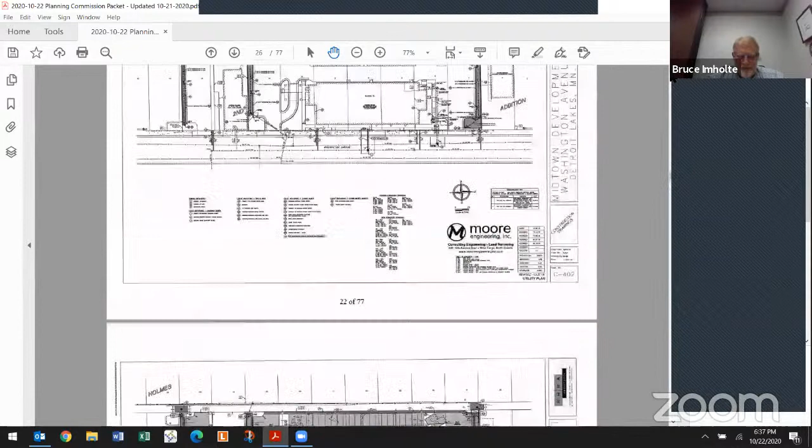All right, thank you for that. And again, I appreciate your patience on this. So the first item is a public hearing to give consideration to a variance to allow 13.61% landscaping at 1218 and 1234 Washington Avenue. That's the Midtown development.

And before we get too far on that, I just looked across the street, Larry, and I noticed they got one of the buildings labeled 1212. So I don't know if that's a technical thing we need to worry about, but just please note that. I don't know if we have the right address on those. All right, Larry, if you could give us the rundown here, please.

This is a request from Midtown Development for 13.61% landscaping instead of the required 15% landscaping at their address. We have it as 1218 to 1234. I don't think the physical address is that important. If it's 1212, that's probably close enough, but I'll take that up with Steve Hansen and see what the address should be.

The reason they're requesting a variance is that after they got going with their project, they discovered that the trenches that were going to be filled with landscape rock and plantings were no longer big enough or held enough volume of stormwater to satisfy the Pelican River Watershed District's requirements. So with the changes they've had to make, if you look at the plan on the screen, the green and the pink are the areas that are going to be landscaped. It comes to 13.61%. They're short 806 square feet of landscaping.

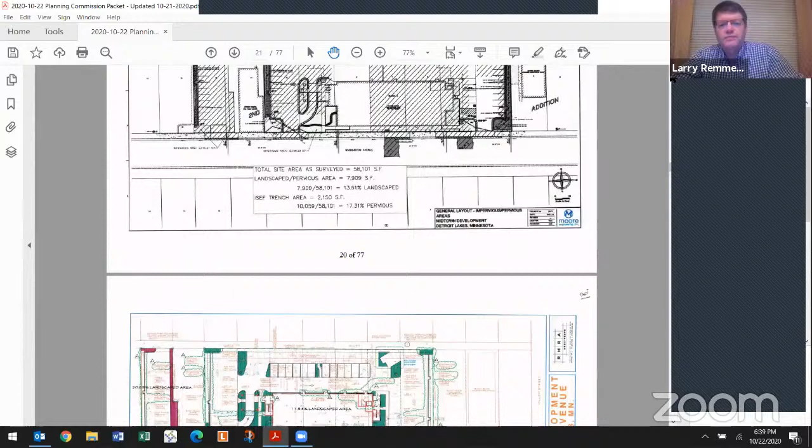And if they would have been able to landscape where they wanted to, if you look on this next map, the dark gray bars were also areas that would have been part of their landscaping, and they would have exceeded the required landscaping. So now they've got stormwater treatment on the site and landscaping at 13.61%.

In order to consider a variance, the Planning Commission has to make findings, and staff has recommended that the following findings be considered. First, the variance is in harmony with the purpose and intent of the ordinance, as the project will provide some landscaping on the site for aesthetics and also provide stormwater treatment. Two, the variance is consistent with the comprehensive plan, as it will allow a commercial use in a commercial district. Three, the proposal will put the property to use in a reasonable manner.

As I mentioned, the original plan met the landscaping requirements. However, due to changes in stormwater treatment required by the Pelican River Watershed District, the stormwater treatment areas could not be filled with landscape rock. With this change, the project no longer met the 15% landscape requirement.

The circumstances are unique to the property, as the original stormwater plan had landscaping that met the city's requirements. And the variance will maintain the essential character of the locality, as the new project will provide stormwater treatment as required by our ordinance, and 13.61% landscape coverage where none existed prior to the development.

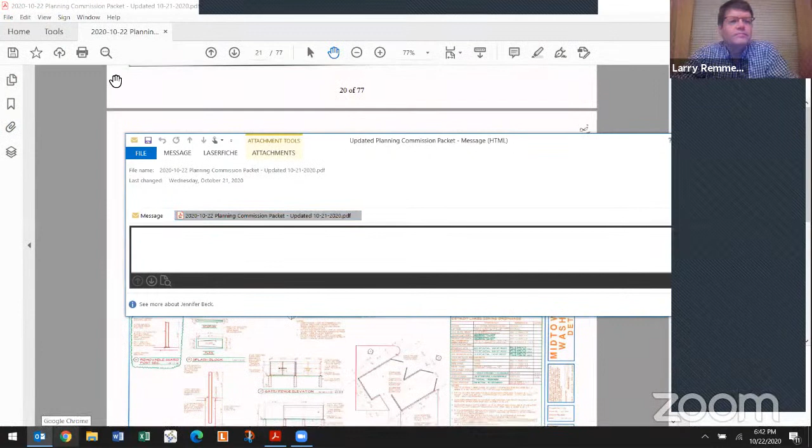Jen, do you have that letter? Could you read that? Is there anyone from the watershed on the call that has the letter in their possession? They could read it? Yeah, Kelsey, go ahead. Yeah, Bruce, I can read it.

Go ahead, please. This says: Dear Planning Commission members, on behalf of the Pelican River Watershed District, I offer the following comments regarding the variance. The applicant had included a landscape feature, a rock grate system on top of the stormwater treatment practice, which is the trench with an iron and sand filter. However, after consulting with Andrew Erickson of the U of M Stormwater Research Center, he recommended not using the rock landscape feature on top of the practice due to it impairing the function of the stormwater management practice, which is the phosphorus removal, and making it significantly more cumbersome to maintain the practice.

The district approved a stormwater management permit for the site in 2018. However, the current as-built site does not comply with the district's 2018 permit. The district respectfully asks the commission to include as a conditional approval of variance an approved Pelican River Watershed District permit for the as-built site. Thank you for this opportunity to comment. Signed by Adam Mortenson from the Pelican River Watershed District.

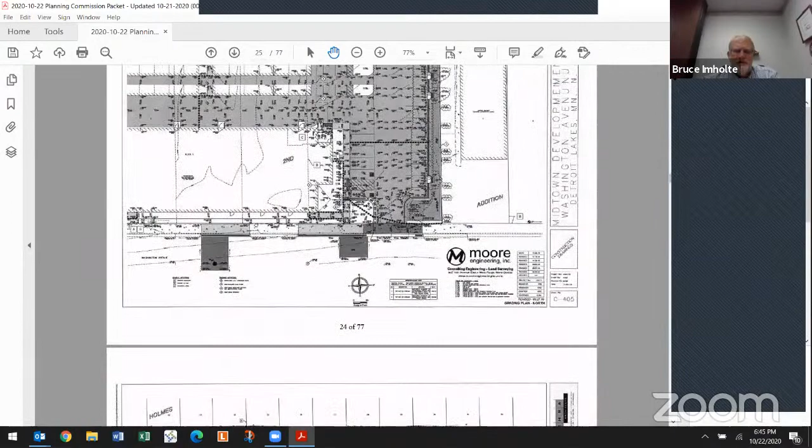Is there anyone else from the public that would like to comment on this variance for Washington Avenue for Midtown Development? Anyone else in the audience? Yes, Bruce, Jim Buus is online here. Oh, Jim, okay. You're representing Midtown Development, I assume, Jim.

Hello? Jim, are you there? Now you can hear me. Can you hear me? Yes. We can figure this technology out, right? I hope. Please go ahead, Jim.

All right, yeah, Jim Buus here representing Midtown Development. I don't have a whole lot to add to what Larry said. He did a good job explaining the situation. I would just say, as many of you know, we're about 3.5 years in on this project. It's a long road, but we're really proud of what we've accomplished with this site, and we're desperately motivated to just get it across the finish line here. This is one of the last things hanging out there. And as Larry said, we've had a little confusion over the years. We felt the rules have slid a little bit, and we've tried to comply.

I think we had everything approved at one point, but things slid a little bit. We were out of compliance a little bit with those pits, and with a little bit of changing direction from Pelican River primarily. The second thing is we tweaked the very far northwest corner of the lot where we ran into a natural gas line and had to tweak things a little bit. We just got a little over 1% out of compliance there, but we would respectfully request the commission's approval because we don't have anywhere else to accommodate that extra 1.3% on the site.

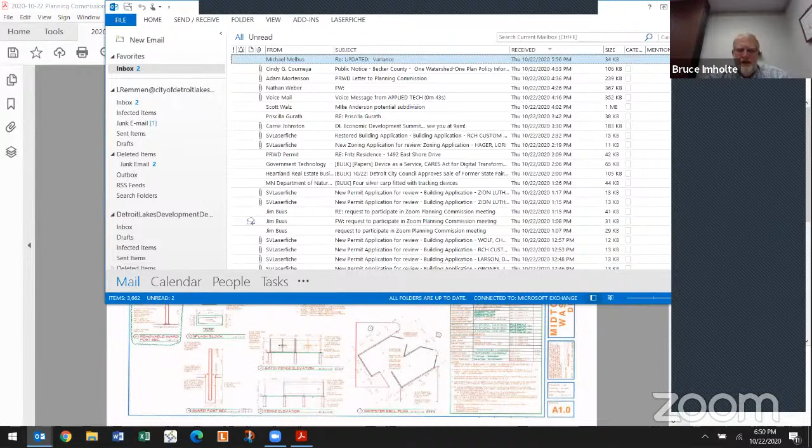That's not a problem. Well, I'd appreciate it. I've just been shopping for bushes at our office, and for about 75, 80 bucks you can find something that's about 3 feet high—not a tree. You can get these, I don't know what Ginny calls them, but different kinds of bushes that just expand out. I don't want you to cover up your windows, I understand you need that, but if you would consider that, it would help break up the whole sidewalk there, so much pavement, because now that the street is in there, there's a lot of pavement from one end to the other.

As long as nobody else is speaking up here, I do have a question, Kelsey. As you read the letter, I got a little confused from what Larry started out with. To me, the letter said the watershed just wants to come into compliance with the 2018 permit. They're not asking for something new, are they?

Bruce notes that the letter asks the commission to include, as a condition of approval of the variance, an approved Pelican River Watershed District permit for the as-built site. He's unsure if they're looking for a new permit or just compliance with their existing permit, and asks Larry to correct him if he's wrong.

Larry says it depends on how you read the letter. His reading is that they wanted a new condition on the permit requiring an as-built permit from the watershed district, which seems like a bit of overreach. He notes nobody from the watershed district is on the call.

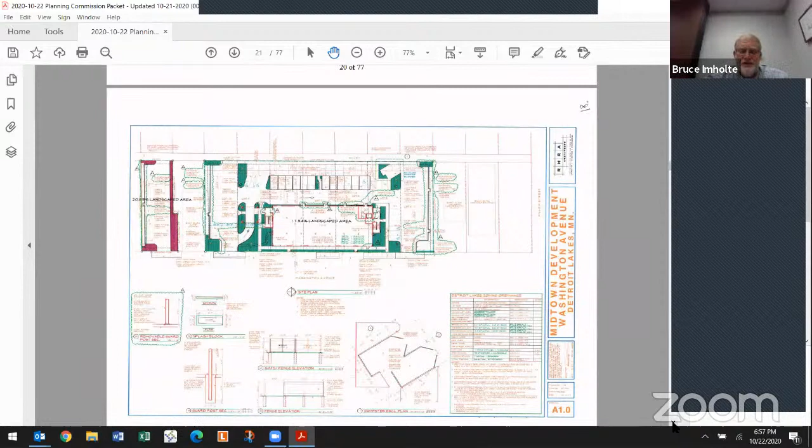Yeah, I've got a question. This is Nancy. Because the landscaping that had been planned that we can't do now was to go over these trenches, as I understand they're trenches. I'm wondering about the look of the trenches and the safety of the trenches.

We have addressed the safety of the trenches. They have a steel grate over them so that cars can't go in there or people can't go in there.

Nancy, did that answer your question? Yes, it did. Thanks. I haven't been able to drive down there because you can't drive down that street. But previously, I feel like there were chain link fence around it. I'm assuming that's no longer going to be there. Correct. That will not be there. Okay, that's all. Thanks.

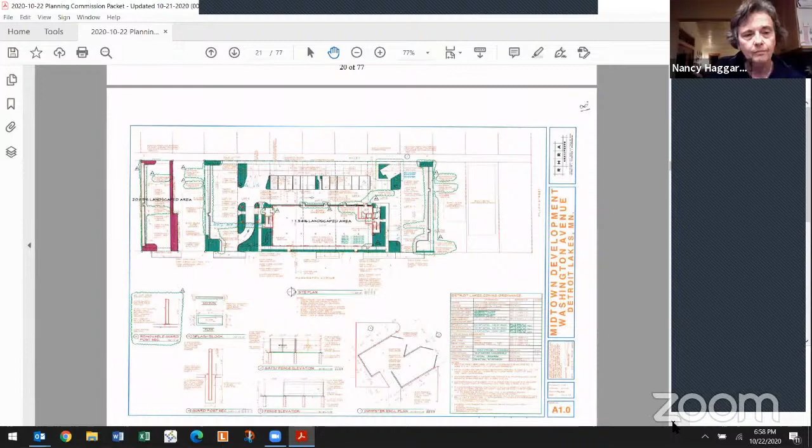Anyone else from the Planning Commission have any comments or questions? Okay, so just to summarize this, and Larry, again, you had one condition, and that's not in our packet.

I'm going to ask you to read that again so everybody understands what it is. But as regards to the watershed, we can move this forward with the one other condition that Larry has had on here. Obviously, if people want to move it forward, they would vote for that. If you don't want to move it forward, you wouldn't vote for it.

We could also add a condition that we ask them to comply with the watershed's request, or if, as Larry suggested, if you are comfortable voting with it without the watershed letter and requirement right now, we would certainly ask them to clarify that before the Community Development Committee meeting in November. So those would be the options that I see, and if anybody else has any other suggestions, throw them out there. Otherwise, I would be looking for a motion here.

And Larry, before we have the motion, please repeat your condition that you had. Okay, the one condition that I recommended was that the owner bring the property into compliance with the land disturbance permit and maintain all stormwater BMPs and comply with the stormwater management facilities maintenance agreement.

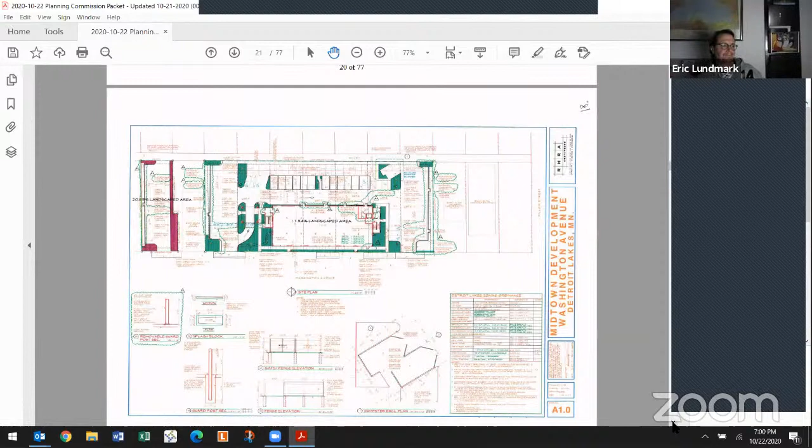I'll second that. This is Eric. Motion by Bob Luizo, second by Eric Lundmark. Okay, thank you. Bob, if you have further comments, go ahead now. I didn't mean to cut you off.

Okay, that's all right. My rationale is the information from the watershed district came so late that nobody's had a chance to clarify what the meaning of the request is. So I don't think it would be appropriate for the Planning Commission to act on that additional information without input from them directly.

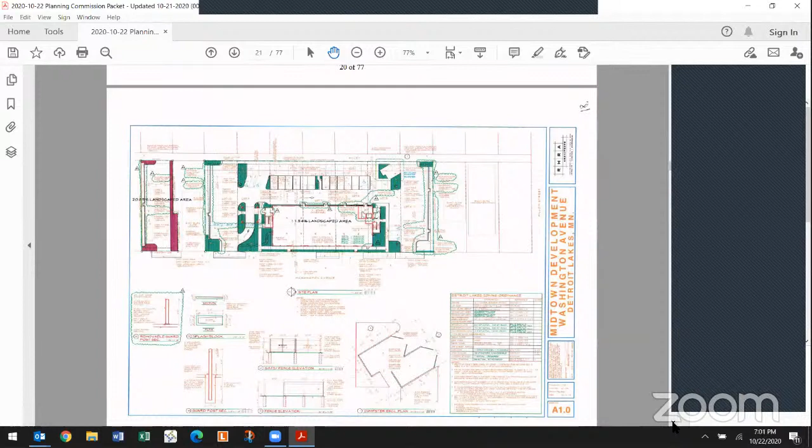Okay. Any other further comments on the motion? If not, I'm going to do a roll call. The motion as presented by Bob, seconded by Eric, and with the condition mentioned by Larry.

And so Liz, how do you vote? I vote yes. Bob? Yes. Chris? Aye. Dan? Yes. Don? Yes. Eric? Yes. Nancy? Yes.

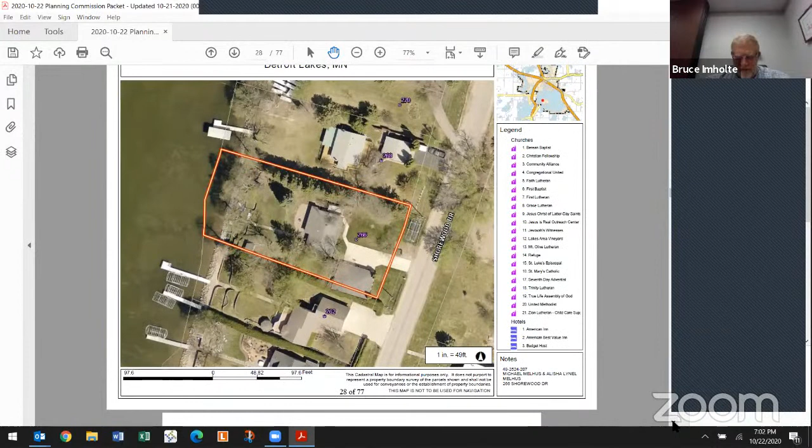This is a request for an after-the-fact variance from Michael and Alisha Melhus for a 6-foot high fence with a 24-foot setback from the road right-of-way, and a variance for a 16 by 16-foot storage shed in their front yard.

We feel that this variance is not needed as the applicant has a reasonable use of the property without it. The applicant could still construct a 3-foot high fence in this location, or a 4-foot high chain link fence, or build a 6-foot high fence if it met the 30-foot setback, meaning they would have to move it 6 feet.

The second part of the variance request is for the 16 by 16-foot storage shed in the front yard. City ordinance no longer allows water-oriented accessory structures. The applicant did have an 8 by 10 shed, about 7 feet tall, located next to the lot line about 30 feet from the shore.

They would be able to rebuild that structure and maintain it indefinitely, as state law allows that. In this case, the property owner demolished the structure and built a new 16 by 16 foot shed in a different location, without a building permit. The shed looks more like a guest house with the windows it has, but it is a 16 by 16 foot shed.

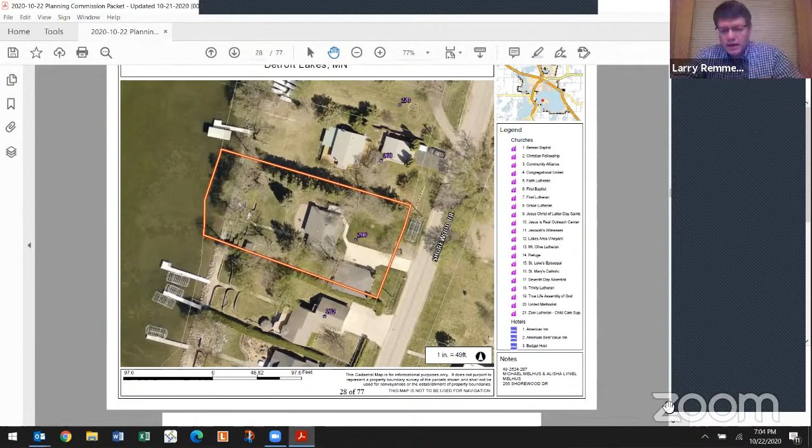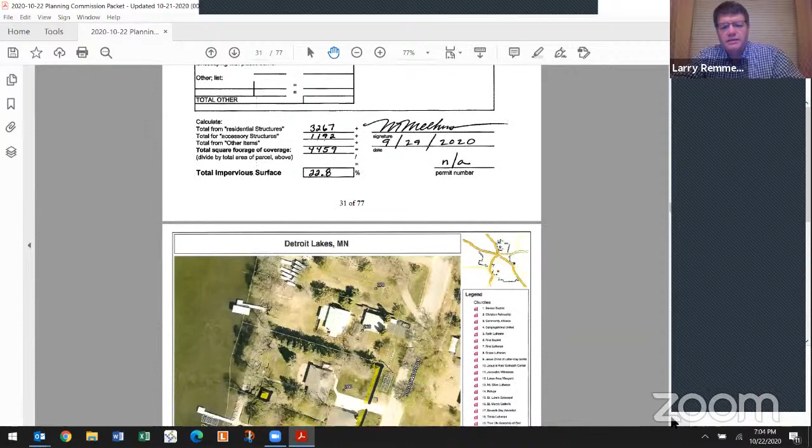I'm going to show you some pictures that were sent by the applicant. You received all of this in your packet. Here's the site plan.

It shows the area where the fence would be up towards the street, and it shows where the shed would be located.

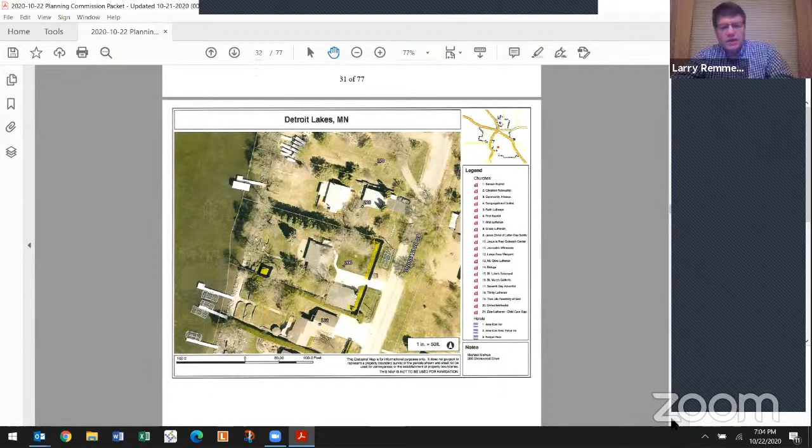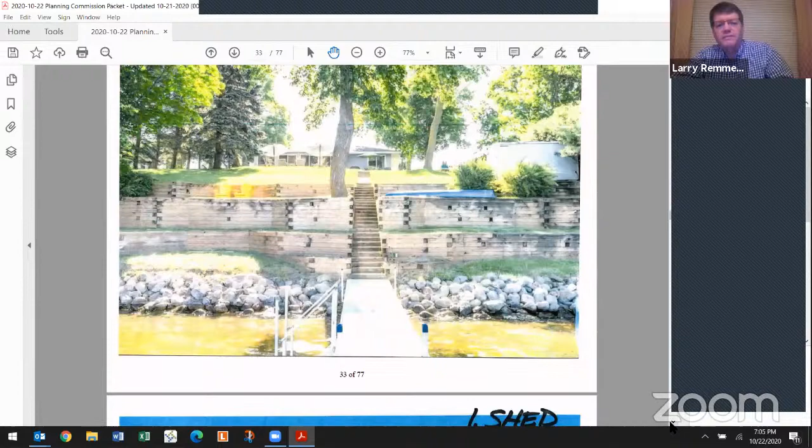Here's a picture of the property, and here's the new shed on the property. This is a picture of the old shed that was there, and here's a closer view of the new shed.

This is showing the fence location. The fence is actually installed at this time. Here's another shot showing the fence on the other side of the property.

The Planning Commission should consider the following findings. Number one, the variance is not in harmony with the purpose and intent of the ordinance, as it would allow construction of a 16 by 16 foot water-oriented accessory structure when current ordinance does not permit such a use. It would also allow the expansion of a non-conforming use.

Two, the variance is not consistent with the comprehensive plan, as it would allow a use that is not considered appropriate in a residential district in the shoreland.

Number three, the proposal does not put the property to use in a reasonable manner, as the property owner has a reasonable use of the property without the variance. Allowing a 6 foot high fence where 3 feet is required is not reasonable. Also, it is not reasonable to allow a use not permitted by the ordinance. The owner has the ability to rebuild the small shed previously located on the property.

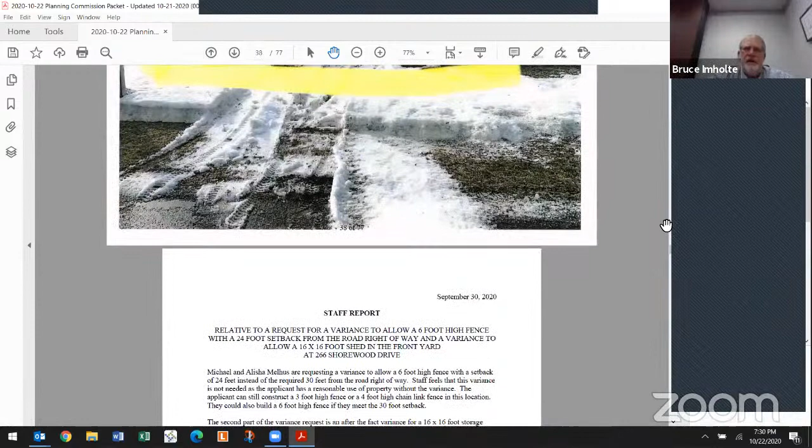This is Nancy Haggart. I would move to deny the variance. I think that we need to stop this getting permission. Wait a minute, you make the motion, then you can make a comment. So I have a motion to deny the variance, I need a second to that motion first. I'll second that motion, Don Marstoon. Okay, second, motion by Nancy, second by Don.

Sorry to cut you off, Nancy, but now you can make your comments. Yeah, I'm just a big supporter of what Larry said, that we have got to stop asking forgiveness from people that just go ahead and don't find out the rules. I'm sorry Mr. Melhus didn't look into what the rules were, but we have to be consistent with our plan. Thank you.

Any other comments? Yes, with regard to the fence variance, we did just deny a fence variance like this for Mary Persons at 1158 South Shore Drive. We required that she build her 6-foot high fence 30 feet back. And that was just last month.

Okay, anyone else in the Planning Commission have any comments before I call for the vote? Anyone else? Okay, I will call a roll call vote again in the same order we've been doing it, so be prepared for that. The motion is to deny the variance.

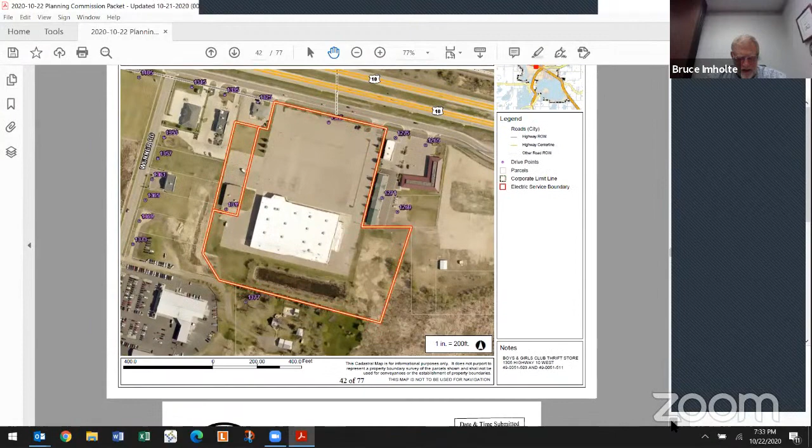Public hearing to give consideration to a variance to allow 343 parking spaces instead of the required 408, and a waiver of payment in lieu of spaces, to allow a future lot development at 1305 Highway 10 West.

Larry? Yes, this is a request from the Boys and Girls Club thrift store. They're asking for a parking variance. They would have 343 parking spaces on their site instead of the required 408 spaces. This would allow them to split off a 2.24 acre site for an Aldi's grocery store. They're also requesting a waiver of the $2,500 payment in lieu of parking spaces fee.

I should note that the Aldi's site would meet the parking requirements, and the combined site of the Boys and Girls Club thrift store and the adjacent 8,000 square foot building requires 444 parking spaces and will provide 456 parking spaces through a cross-access easement.

So even though we're technically requiring a variance for the Boys and Girls Club thrift store site, in reality they will meet all of the parking requirements by having a cross-access easement with the 8,000 square foot retail store next door. Also, the Boys and Girls Club thrift store is not going to generate the same amount of traffic that a Kmart generated, and that's another reason why the variance would make sense. But the practical reality is that they would meet all of the parking requirements necessary on site.

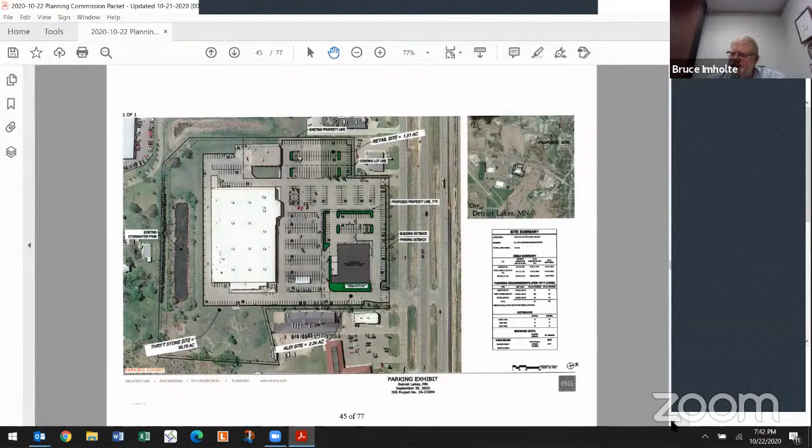Okay. Anyone else, whether planning commission or otherwise, that's online that either has a question or a comment regarding the parking variance for the Boys and Girls Club? Anyone else? If not, I'm going to close the public hearing, which I'm doing now, Jen, and again open it up either to a motion or to any further comments or questions from planning commission members.

Say, Bruce, could I just interject just for a minute? Larry did have some recommended conditions. I don't know if we've discussed those yet. Let's talk about that. Based on the findings of fact in your staff report, I'm recommending approval of the variance subject to the following conditions.

1, that the lots be split as shown on the approved site plan. 2, that the owners provide a perpetual cross-access easement among all these parcels, and this be recorded at the same time as the lot division takes place. And 3, that the 51 additional parking spaces, as shown on the site plan, be constructed by November 10th, 2021.

Larry, do we, if you're recommending a waiver of the fee, do we want that as one of the conditions also or not? We would list that as part of the variance, that we are waiving the fee as part of the variance. Gotcha. Okay. That's assuming that people want to waive the fee. I guess I don't want to jump ahead here.

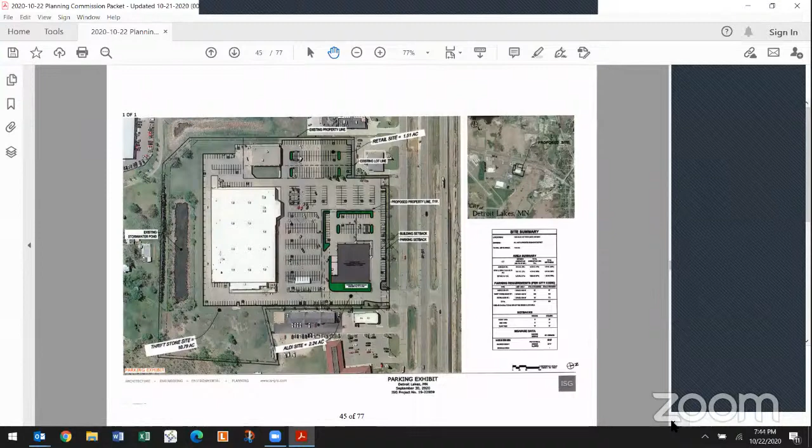Okay, I'm okay with that being just a cross-access easement between the Boys and Girls Club and the Sears store, since that's where the number of parking stalls comes from, because Aldi's does stand on its own.

Bob and Chris, are you okay with that clarification on the motion? This is Bob. Yes, I am. This is Chris. Yes, I am too. Okay, let's make sure then in the motion, Larry, when it comes to council, you've got that clarified, if you would, please. Yes. Thank you, Scott, for bringing that up. Any other comments from Planning Commission members?

Okay, we're going to take a vote. How do you vote, Liz? Aye. Bob? Aye. Chris? Aye. Dan? Aye. Don? Aye. Eric? Eric, are you there? Aye. Thank you. Nancy? Aye. Imholte, aye. All right, thank you, and thank Aldi for coming to town, and good luck to the Boys and Girls Club.

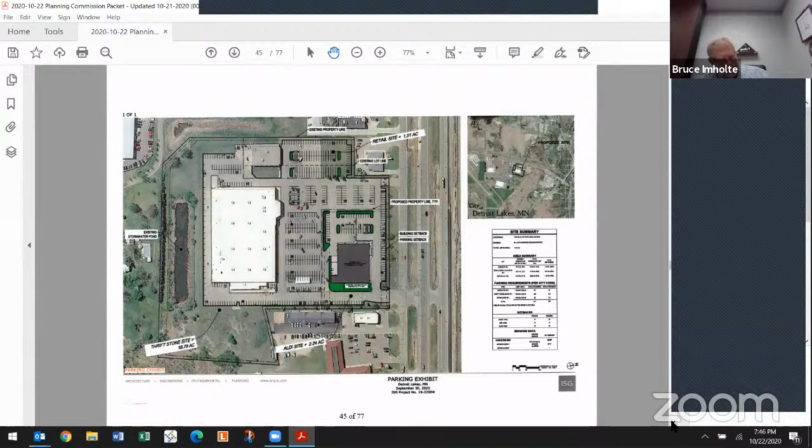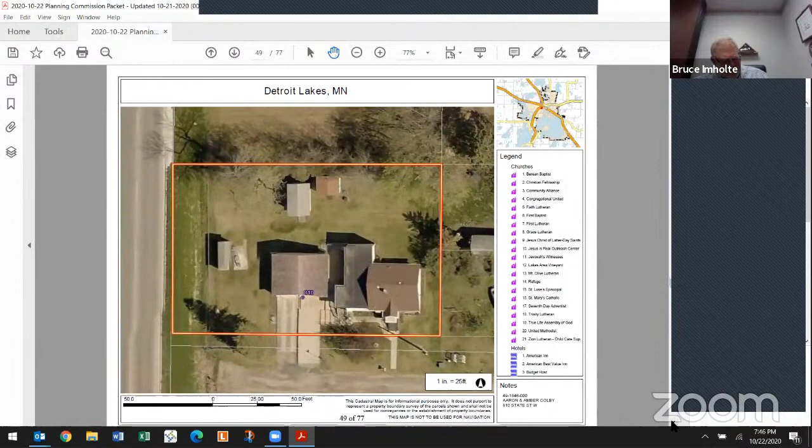Thank you. All right, we're on to item D. Public hearing to give consideration to a variance to allow a 6-foot fence in the side yard next to the road at 810 State Street West. Larry?

Yes, this is a request from Aaron Colby for a fence in the side yard right along the property line along the Home Street extension to allow a 6-foot high wooden fence. He was inadvertently issued a building permit for this fence, as it was noted that it was a replacement of an existing fence, but in fact it's quite a distance from the existing fence. But be that as it may, staff is recommending approval of the variance he is requesting. Basically this would allow a 6-foot high fence similar to the one Ben Grimsley has, so he's requesting a 6-foot high privacy fence adjacent to Home Street.

There are similar fences along the street south of 810 State Street, and consideration should be given to the following findings of fact. One, the variance is in harmony with the purpose and intent of the ordinance, as it will allow a privacy fence that will not impair the safe use of the street and will not impede sight lines. Two, the proposed use is consistent with the comprehensive plan, as it will allow a use common in residential areas. Three, the proposal will put the property to use in a reasonable manner, as it will match the fence already in place to the south. The intent of the ordinance is to keep clean sight lines at intersections. However, since State Street is a dead end that does not connect to Home Street, there is no intersection here, even though this is a corner lot.

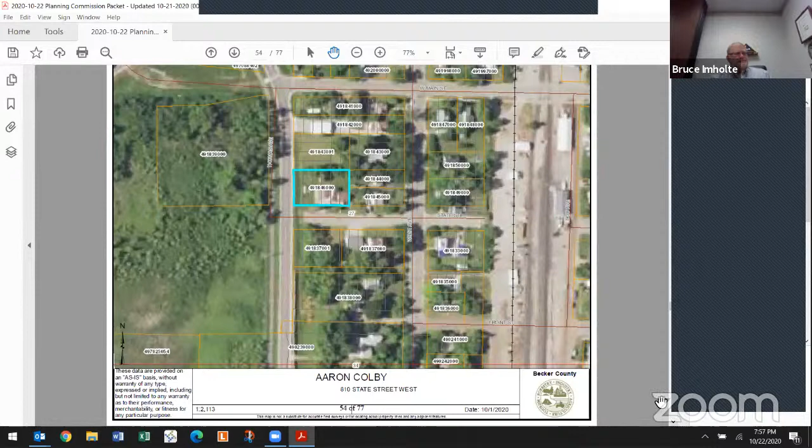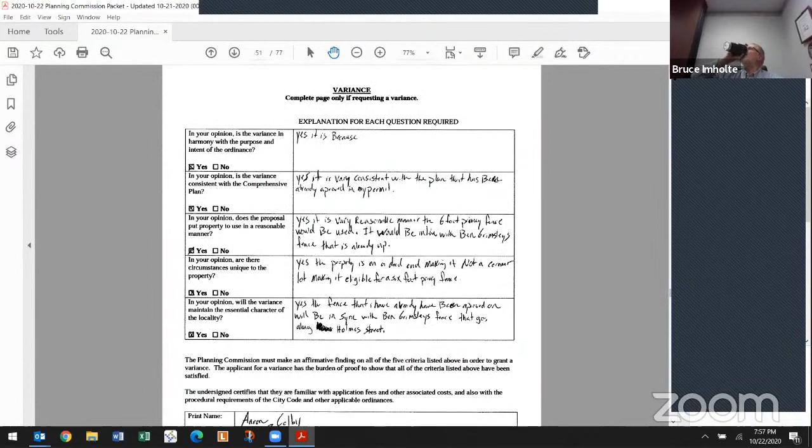Bruce, I have a question for Mr. Colby. Mr. Colby, this is Liz Foster. When you originally went in for your permit in July, were you under the assumption that you could build the 6 foot fence, or were you told that you should be building a 3 foot fence at that time?

In my application, I said I wanted to put a 6 foot privacy fence along Holmes Street, the length of my property, though we only have limited tools to draw the fence line. When I went in, I was approved for it by Larry. Then it happened that I had Patricia on my property checking something else, and I asked her to make sure my fence was the right distance from the road according to our plans, which she said it was. Then she said she wanted to double check something because something was skewed on one of her papers, and when she called Larry, he said I couldn't actually put the fence there because it was technically a corner lot, though not actually a corner lot since I'm on a dead end. So I was approved and had started the fence, and then it was going to be denied no matter what, even if I built it exactly like the plan that had been approved. So I guess that would be my issue.

Thank you, Mr. Colby. I do have a follow-up question. Are you building a 6 foot fence for noise reasons, or what are the reasons?

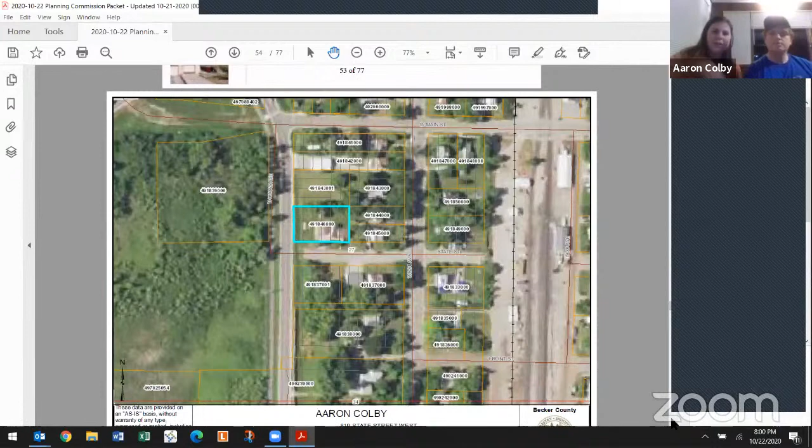Thank you, Mr. Colby, for the follow-up. Can I just add something? I'm Amber Colby, Aaron's wife. I'd also like to add that our yard has quite a downward slope to it, so with a 3 foot fence, with that busy road right there, you would still be able to see the majority of our yard just because it slopes down quite a bit. So a 6 foot fence, that's another reason we were hoping for, was just for privacy for our son, since it is such a busy road.

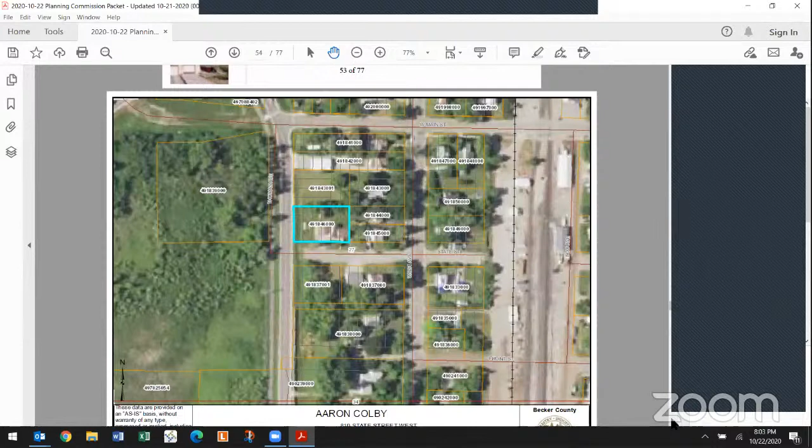That could change. I'm wondering about that corner of the fence. If you have a 6-foot high fence there that's permitted and in place, and there's a determination they need to extend State Street for some reason, it would seem to me that the prudent thing to do would be to at least put an angle on that corner of the fence so there would be sufficient line of sight to meet the requirement if the road were ever opened up. We don't know what future councils will want to do or what future developments will require, and I would hate to see...

I'd suggest that we add a condition that if State Street is in fact put through and connected, they then have to reduce the height of that fence to 3 feet, back 20 feet from the intersection.

Larry, we're having a little trouble, I don't know if anybody else is having this trouble. There's a little feedback on what you just said there. I wonder if there's a way to... Yeah, I'll turn my volume down a little. Turned it up to hear Bob. So...

What I'm suggesting is that we put a condition in that if State Street is ever put through, we would require the fence to be reduced to 3 feet high within 20 feet of that intersection. Did everybody hear that? Yes, I could make it out. Yes, I could. Okay. Thanks, Larry. Thanks, Bob, for the question.

Anybody else have any comments or questions from the Planning Commission? If not, I'd be looking for some type of motion here.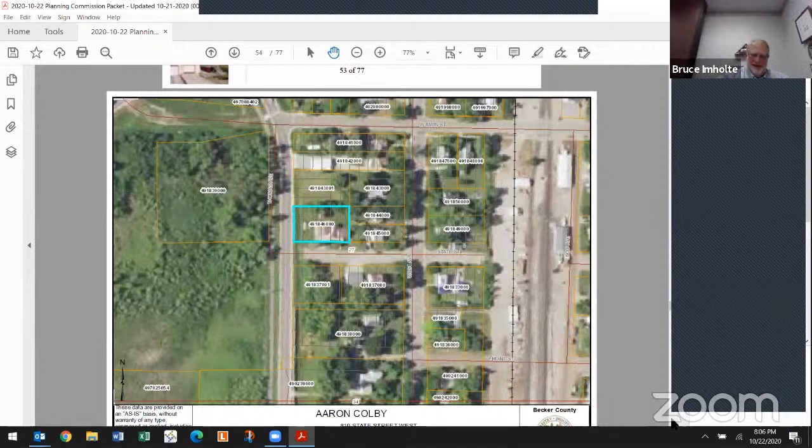Bruce. Yes, sorry. Can I have Larry check his mic here one more time? Yeah, that would be good. Yes. Thank you. How does this sound? Not good. I hate to do this, Larry, but you might have to disconnect and try to reconnect. Okay. Is this any better? I turned the mic up. No, not to me, it isn't. Okay. We'll see you later.

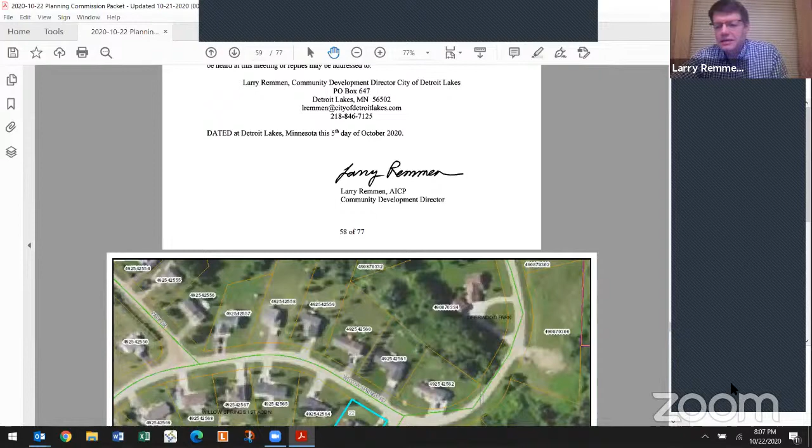Was he going to reconnect again, Kelcey? Was that the plan? I hope so. Okay. Otherwise, if not, you might be prepared to introduce us to this next item.

See, Dan, it figures that the first chicken permit would be in the first ward there too, by the way. I figured it would be right next to my house. So,

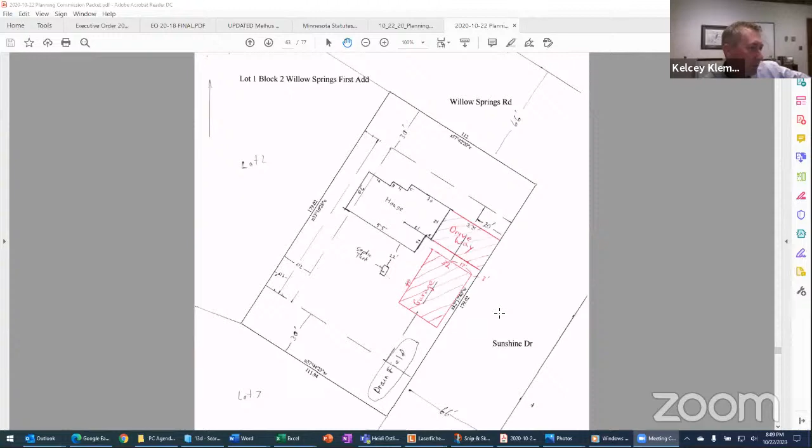Larry, you're back on. Do you want to? Can you hear me? Do I sound better? You sound great now. Thank you. Okay, good. So basically, as Kelcey was telling you, Mr. Strand would normally be required to have a 20-foot side yard setback. He's asking for a 3-foot side yard setback so that he can construct a 32 by 40 foot accessory structure.

You should consider the following findings. First, the variance is in harmony with the purpose and intent of the ordinance, as it will not negatively impact the use of the road or affect the orderly development of the adjacent property. Second, the variance is consistent with the comprehensive plan as it will allow a residential accessory use in a residential district. Third, the proposal will put the property to use in a reasonable manner as it will allow an accessory use common to residential districts.

It will also improve the aesthetics of the neighborhood as more items will be stored inside. Fourth, the circumstances are unique to the property as the buildable area on the lot is restricted by setbacks, building location, septic system drain fields, and a high water table. And fifth, the variance will maintain the essential character of the neighborhood as the proposed use is consistent with uses on neighboring properties. The building would be accessed off the existing driveway, and the lot is on a dead-end street with very little traffic. The building will not affect or obscure lines of sight.

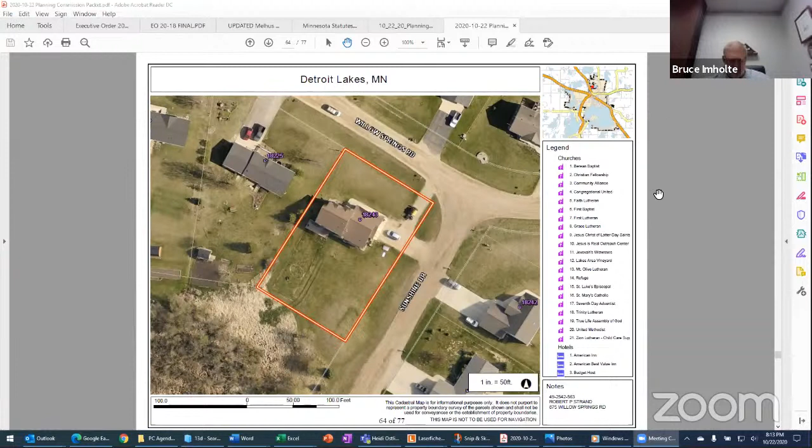Larry, my question would be, not on the variance being requested, but I know there's a swamp or water back there. Are we running into an impervious surface issue here that we need to be concerned with? We are not. Okay.

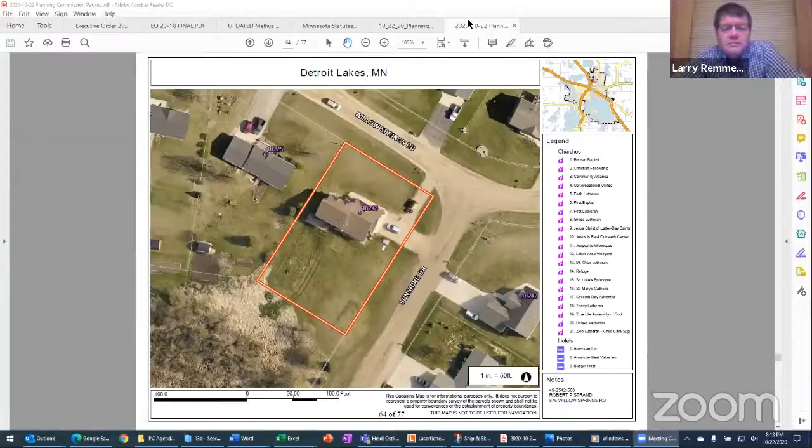All right, anyone else online? Or did you get any letters on this, Larry? I did not get any comments on this application.

Is there anyone online that wishes to speak to the issue of the variance at 875 Willow Springs Road? Anyone else online? Bruce, I do have a couple of people as attendees. I don't know if they wish to speak to this issue or not. They haven't raised their hand.

Jen, can you move over Steve Schumacher and the phone that's listed there to see if they want to speak to this? Yeah, if you're online and you wish to speak to this issue, now is the time to do so. Anyone?

Steve, you're unmuted. Well, Hey, Kelcey, Steve Schumacher here. Go ahead, Mr. Schumacher. No comments, I'm just seeing what's going on.

Okay, thank you. We would love to have the public listen to what we got going on. You bet. Anyone else online that wishes to comment on this issue? If not, if somebody comes on and I've closed the public hearing, we'll certainly be willing to take your comment. In the meantime, I'm going to close the public hearing, and anyone on the Planning Commission member have any comment on this?

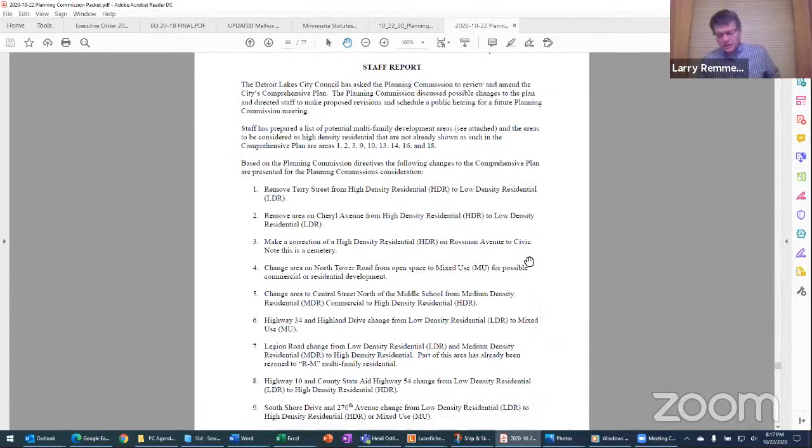Okay, we talked about this a month or two ago, and there's been some discussion amongst the council members about trying to identify high-density residential areas for future development. So we came up with the map that's in your packet. It's got the pink properties shown on it as high-density residential properties. Based on that, we've added some of those items to the comprehensive plan. Number one is to remove Terry Street from high-density residential to low-density residential. I think that would be very good. The city council has passed an ordinance rezoning that area to R2, so it's zoned properly for that.

Item 2 is remove an area on Cheryl Avenue from high-density residential to low-density residential. That's because that area is in the airport zone and high-density residential wouldn't be a permitted use there. Number 3 is make a correction to the high-density residential area on Rossman Avenue to a civic. This is because it's a cemetery, so it's a different kind of area.

Number 4 is change the area on North Tower Road from open space to mixed-use development for possible commercial or residential development. Number 5, change the area on Central Street north of the middle school from medium-density residential or commercial to high-density residential. Number 6, Highway 34 and Highland Drive would be changed from low-density residential to mixed use.

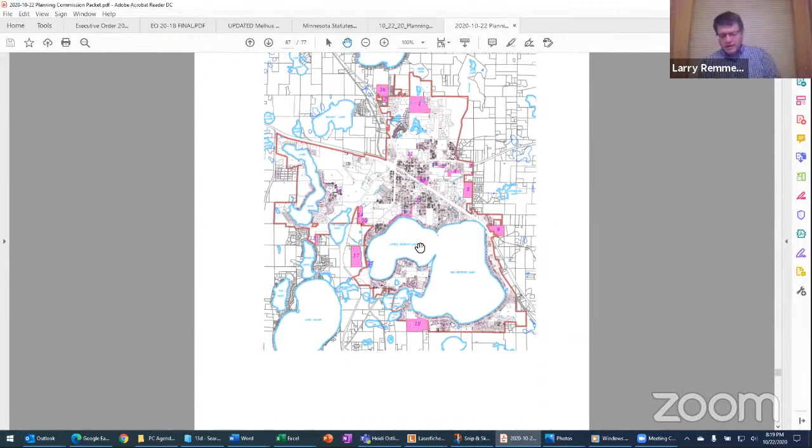And then South Shore Drive and 270th Avenue would change from low-density residential to high-density residential or mixed use. If you look at those pink areas and then flip to the next page, which shows the future land use map, all of those changes are reflected on this new map.

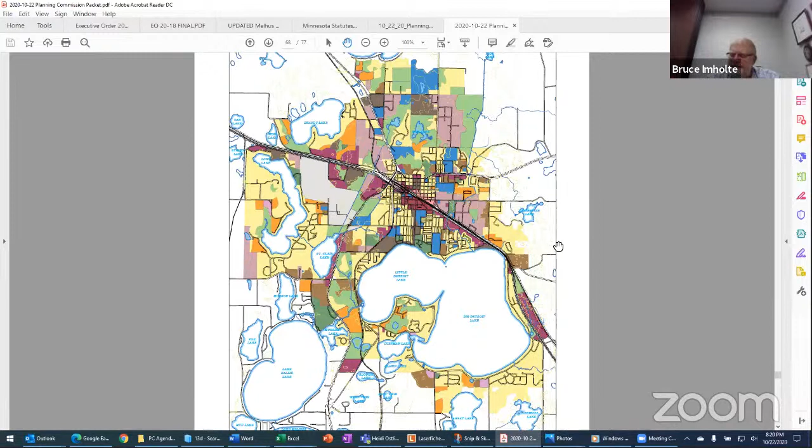So essentially the brown areas, we've added to some of the brown areas, which would be either high-density residential or mixed use. These are the areas we talked about previously. Is there anyone from the public online that wishes to discuss or comment on the proposed changes to the city's comprehensive plan? If not, I will close the public hearing. Anyone from the Planning Commission have any comments or questions for Larry?

Larry, the only concern I would show is, and I was on when we studied this, and I was actually the one that brought up that piece on South Shore Drive and 270th Avenue, but I believe our discussion at the time was that it would be single-family residential along both roads, and that the back piece of that property would be considered high-density residential. So I am concerned if you're proposing it to be high-density residential along both South Shore Drive and 270th Avenue. I think there would be some comments by folks out that way that would object to that.

But the area right at the corner is shown as neighborhood commercial. Okay, but yes, we could amend that slightly and put low-density residential up against South Shore Drive and 270th, and then high density in the back end. That we can do.

I would think that would be more agreeable to the neighbors out there, because you'd have residential homes offsetting residential homes, but you certainly could have high residential on that back piece of the property, which would be fantastic for a developer, given that we're putting a park out there. Yeah, I can make that change. I think that's fair. Everybody on the planning commission okay with that?

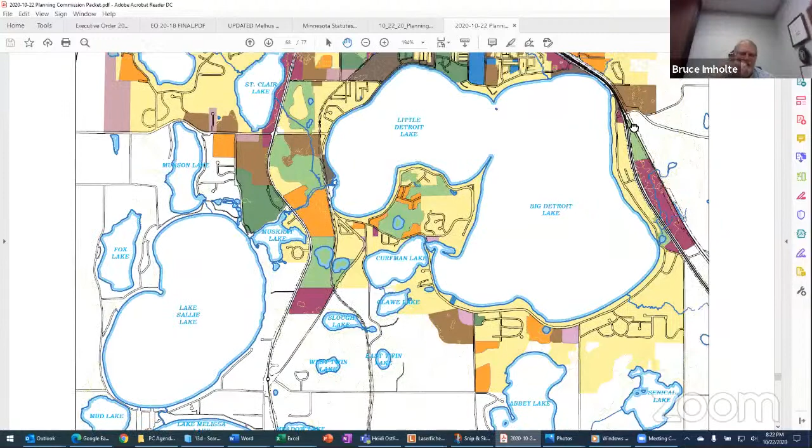Liz? Aye. Bob? Aye. Chris? Aye. Dan? Aye. Don? Aye. Eric? Aye. Nancy? Aye. Bruce? Aye.

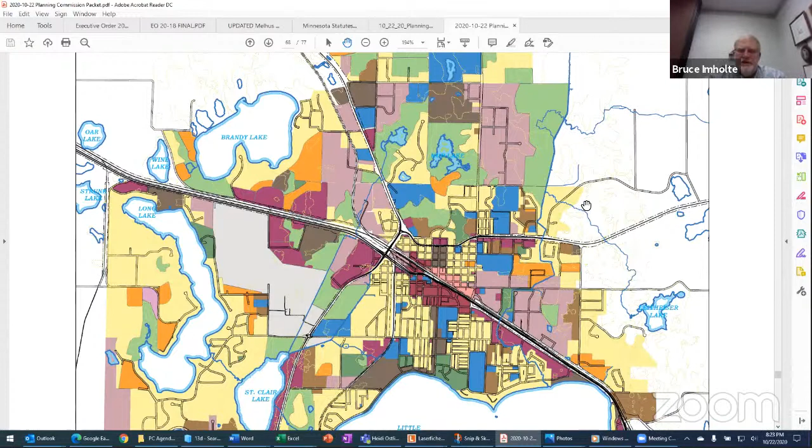Okay, thank you. I appreciate that. Thank you, Larry, for making those changes and bringing that up. I think that helps as people come to our city and want to develop. That gives them some good information. So thank you for that.

Larry, is there anything else, other than - I don't want to get into that last item because I think we're running a little late here - is there anything else not on the agenda that you want to bring up? Nothing else except that November 17th will be our next meeting, and we're planning to make it virtual again like this. Okay, and I asked Jen to check and see if we can do the time at 5:15.

Okay, Kelsey, do you have anything for planning commission members? Oh, I don't have anything else. Okay, anybody, rather than go around the table, anybody else in the planning commission have any comments or things they want to say? It is November 15th. Is that correct or not? November 17th.